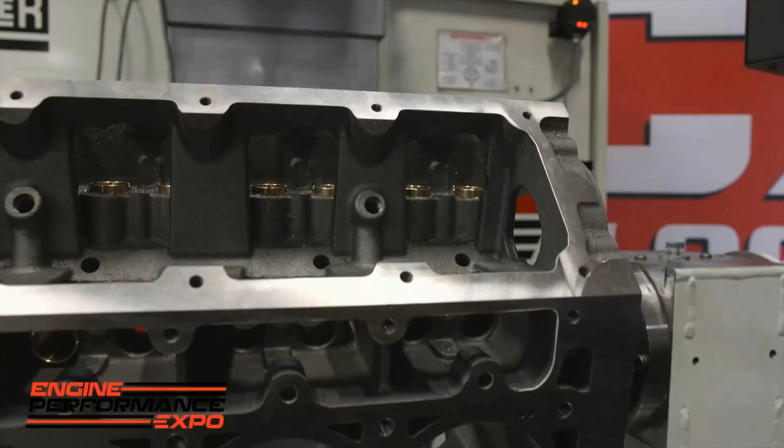This is like the Professor. Jaden is just 21 years old. It's kind of interesting how he fell into this career. He was just telling me a little bit about his life. He loves cars, and now we're on set with Warren Johnson.

Warren, these machines, you told us a little bit before, have just totally changed the way with which you can efficiently produce, try ideas, and do things. And we look at a guy like this, 21 years old, he's already working on the machine. We're going to work on some stuff here. Maybe you see a little bit of yourself in some of these young folks.

Oh yeah, well, they've got the luxury of these machines where I didn't have that before, but I appreciate what these machines can do. But the biggest thing is you have to look at the ability of the software to achieve what you want to achieve. When I design a port now, all I do is put the head bolts in it, put the valve seat in it, the valve guide, push rod holes, and I put a port in there, all on the computer. And Jaden, don't hand port it.

And Jaden, you guys were talking already. They were discussing speeds and feeds and different things about keeping the surface as clean as possible. Talk a little bit about that and how that information is obviously constantly updated.

Yeah, I mean, for any material that you're going to cut, every different head's going to have a little bit of a different, I guess, attribute to it. They're all going to look a little different in your surface finish. And for somebody like him to be able to just walk up and know immediately off the top of his head that something can change, it's pretty amazing.

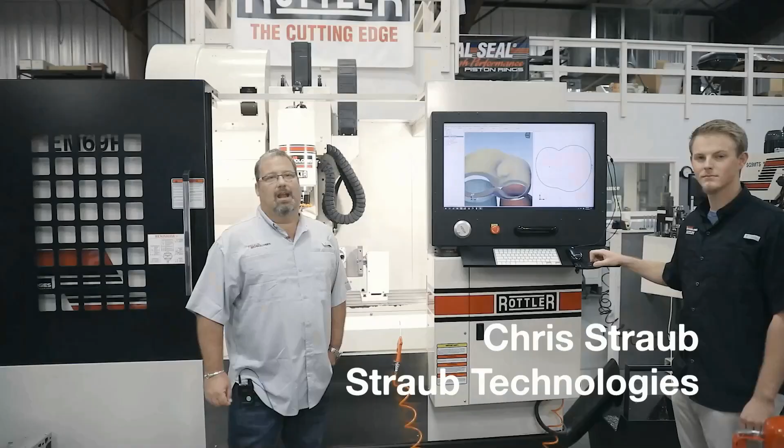Hi, I'm Chris Straub with Straub Technologies, and I'm here with Jaden McCurry. Jaden operates our EM69 Rottler CNC center that we use for porting. At Straub Technologies, we had come to a point where we needed something that could replicate the development work that we had been doing here for cylinder heads. Asking a few questions of people, what CNC cell we needed to buy for CNC porting, one company kept coming up, and that was Rottler. One reason is because Rottler is a self-contained digitizing and machining center. Not only can we use the Rottler to do the machine work, but it can also digitize the part that we want to replicate in the machine.

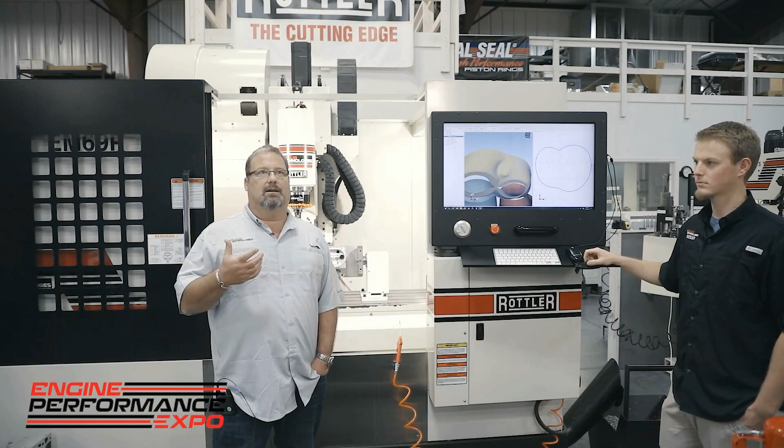Straub Technologies grew from my garage. Never thought that I would be doing anything like this. I've been in the industry for 25 years, but people now with the DIY mentality, they want to be that Grumpy Jenkins. They want to be that Keith Dorton type person and build their own motor. So with the Rottler, being able to produce over and over again the same quality part was important to me. I need to provide something for my customers, and that's what the Rottler machine allows us to do. When I bought the Rottler, they said, Chris, you don't have to know speeds and feeds and all this stuff. The machine knows that.

As long as you can work Windows, then you can become a CNC operator as far as doing port work and stuff. Now, for myself, that's nothing that I want to do, but I was able to hire Jaden, who came out of high school and adapted to the machine very easily. Even though Rottler uses their own exclusive software, it was something that he understood with his background.

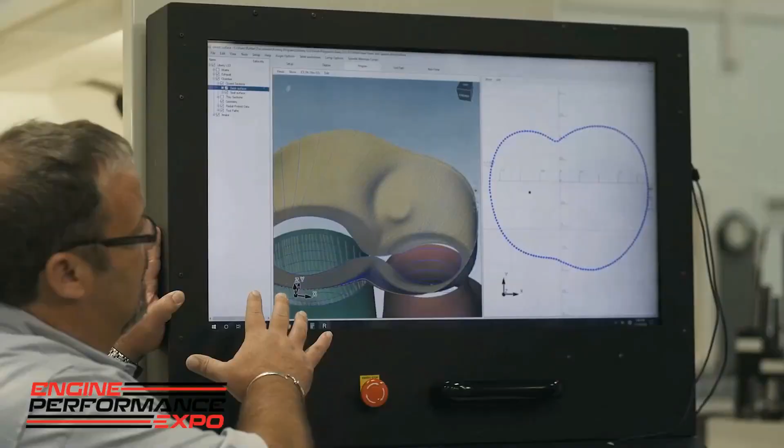So somebody thinking about buying a 5-axis machine for porting, they don't have to worry about Rottler's software. Rottler software is easily adapted to anyone that's had any background as far as the type of machining. So one thing that we do enjoy about the machine is the manipulation of any of the data points that Jaden is able to capture using the Renishaw probe on the cylinder head, easily seen here.

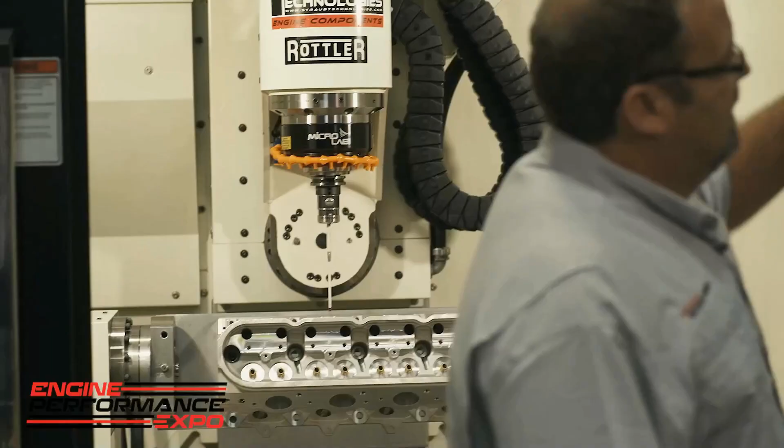And all of these lines represent captured data in the combustion chambers. Each one of these is where the probe has touched, so it's mapped out this combustion chamber of this cylinder head. And Jaden can then go into his computer system in his office, and anything that he needs to smooth or reshape is easily done. That's one advantage the Rottler has over multiple machines, its ability to capture data so fast.

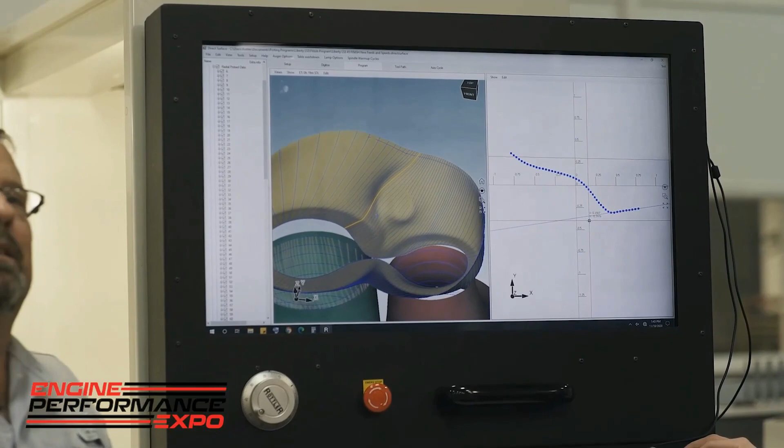You'll hear about people that have digitized over the years, and it might take them a week to 2 weeks to do an intake port, an exhaust port, and a combustion chamber. Jaden's been able to do this in a matter of a day. So that's important to me; I don't have to have as many people, but can produce as many parts as some other much higher volume shops. So for me, as a small business owner in the automotive performance industry, Rottler was my choice.

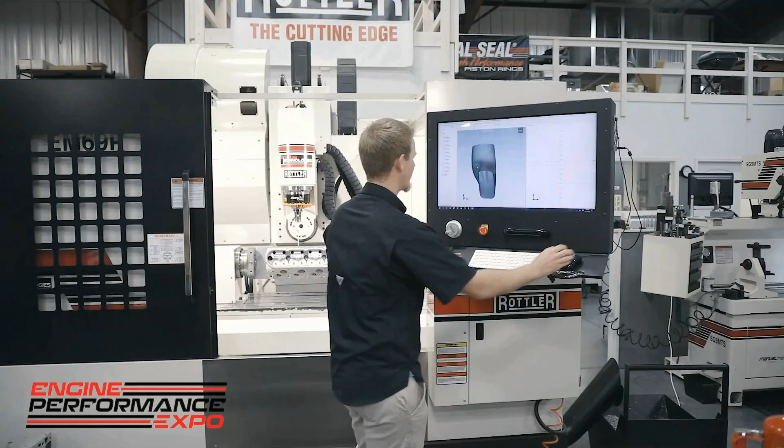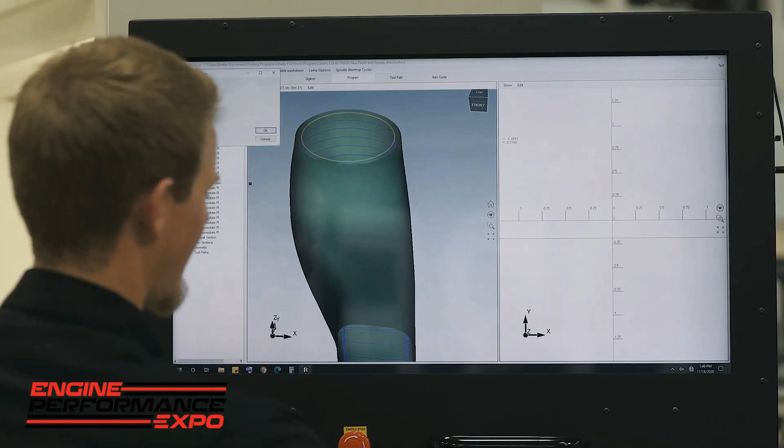Yeah, so this is a port that has already been digitized, and it's already got the through section, so it has its solid surface. If I want to go through and change, say, the plane that's right here on the seat surface, if I want to shrink this entire section, it's as simple as right-clicking on the plane. You can go to section offset. If I want to offset it, say, 250 thousandths, just so you can see what it does, you can see it blew that entire plane out just that quick.

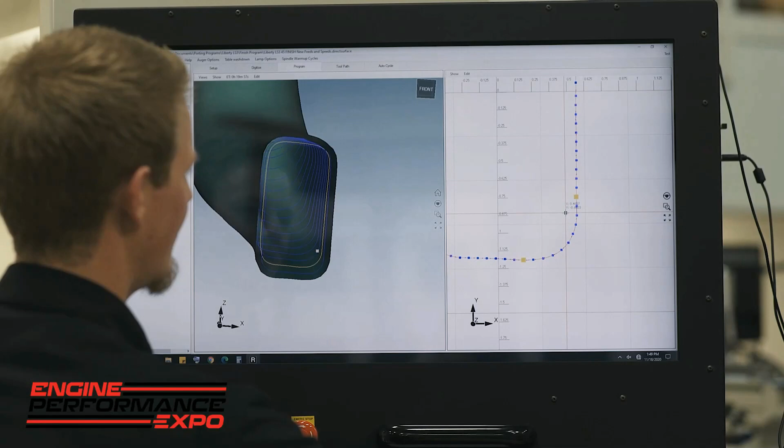So every little change that you make on this thing, you can see all the results just about as quickly as you want to do it. So say you want to change the radius in the corner of this plane. Click that, you can change your arc. So you just make it a straight line or whatever. And you can see it right there immediately as you do it. So it gives a really good representation as you go through if you want to smooth things. There's really not a lot of waiting to get things like you want it to.

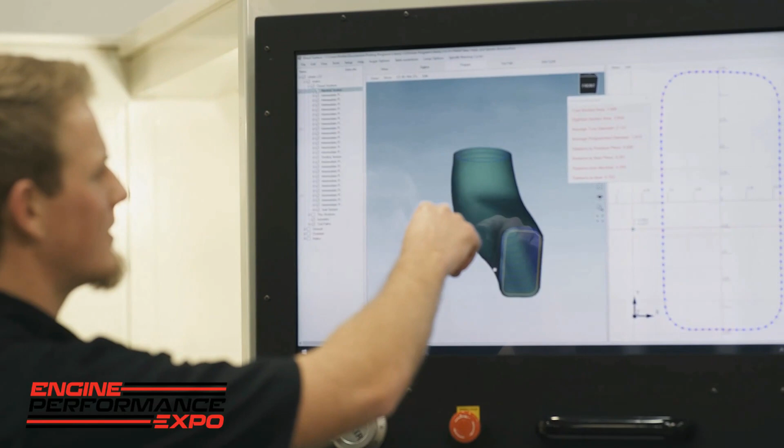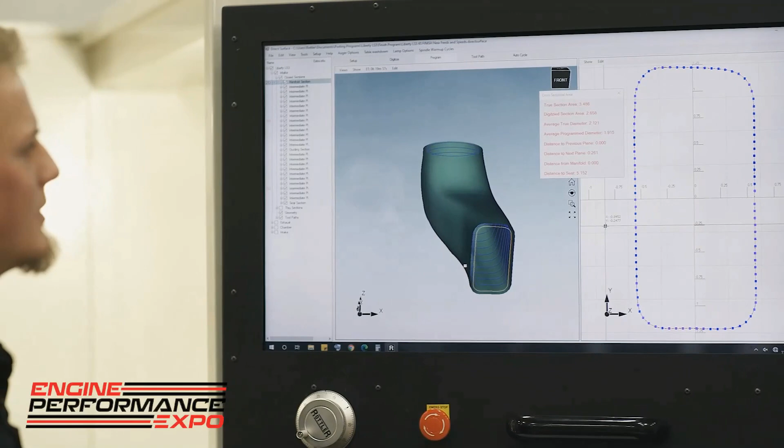With each plane that you go through and digitize, which is what all these sections are with the data points, it keeps record of the sizes, so it's got its own little graph, like a little representation you can keep track of, and you can check out your cross-sectional areas. So you pull the list up; this right here is the manifold section, the first section on the manifold side for the intake port. It gives you your true section area, digitized section area, average true diameters, program diameters.

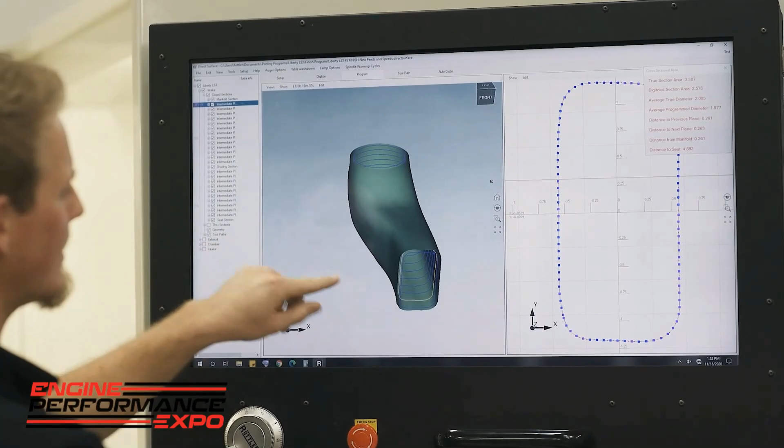It gives you the distance between the planes. It'll tell you how far you are from this manifold plane. So I'm starting right here at the manifold section. Right there it says distance to the next plane: you've got 261 thousandths. If I go to the next one, it shows distance from the manifold, so it shows that we moved 261 thousandths. So if you pick a random plane throughout your port, it can give you an idea of how far into that port you actually are.

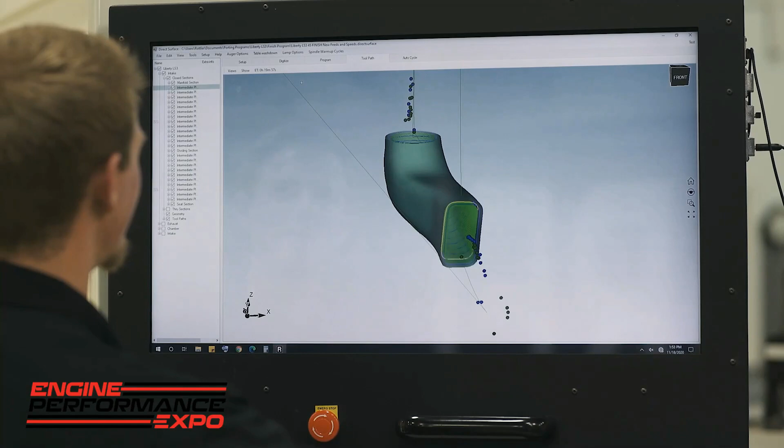Honestly, my favorite feature about this machine is after you've created your ports and you've got your tool paths created, it'll show you where your tool has run. In previous updates, you can hover your tool and it'll show a rendering of it pivoting on these pivot points as it goes through the port. And with the more recent updates, you actually have a function that will show you every spot that that tool moves throughout that port.

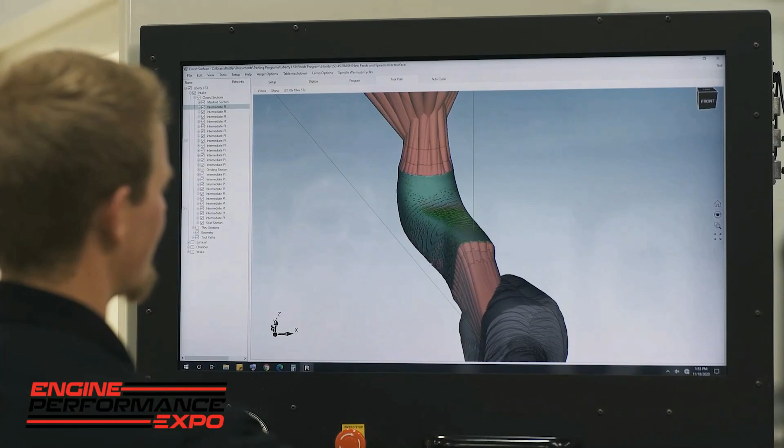And it's really nice because if you have long ports or ports that are making really sharp turns, if that tool is going to get down and try to rotate where it would actually dig into the opening surface, it'll show you that the tool will be poking through the side of the port. So instead of having to hover back and forth and hope that you catch it with your eye, or running it and just being really careful, you're almost guaranteed that you're not going to hurt nothing with that feature.

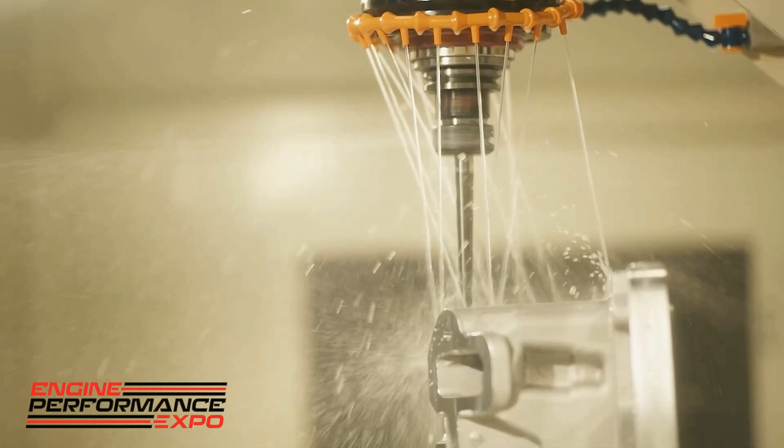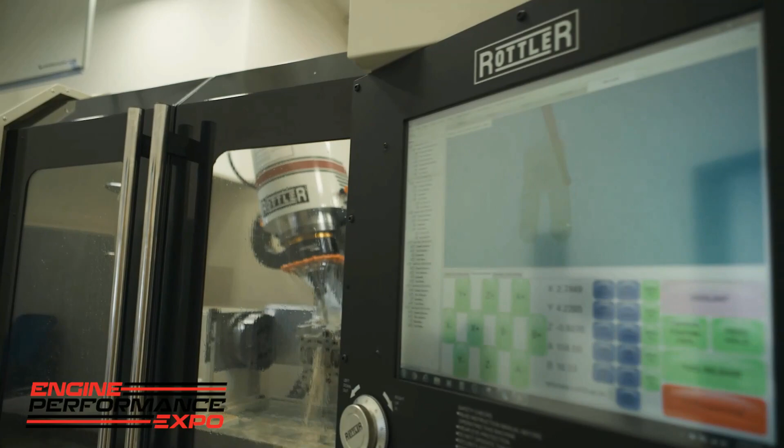Standing in front of our Rottler P69 AHD, it's a cylinder head porting machine. Years ago, we were all kind of talking about possibly purchasing a machine, because we were porting a lot of cylinder heads by hand, and it was taking just way too much time. Literally 8, 10, 12 hours or more for import heads and V8s. We do a lot of imports, a lot of domestic stuff.

So we looked at a bunch of different machines from a lot of different manufacturers. The Rottler basically stood out in front because it's an all-in-one type of machine. So we can hand port a cylinder head, get it on the flow bench, make little changes or whatever we want to do, get the head in the machine, actually digitize it in the machine, do all the modeling, surface modeling, look at how the port design looks, create all the tool paths, run little tool paths, make changes on the fly if you want, and actually port the head in the machine. It doesn't have to come in and out, in and out.

Stuff that used to take us, like I said, 8, 10, 12, 14 hours. Now with this machine, the CNC cycles are generally 2, 3, maybe 4 hours at the most. So you're definitely saving a lot of time.

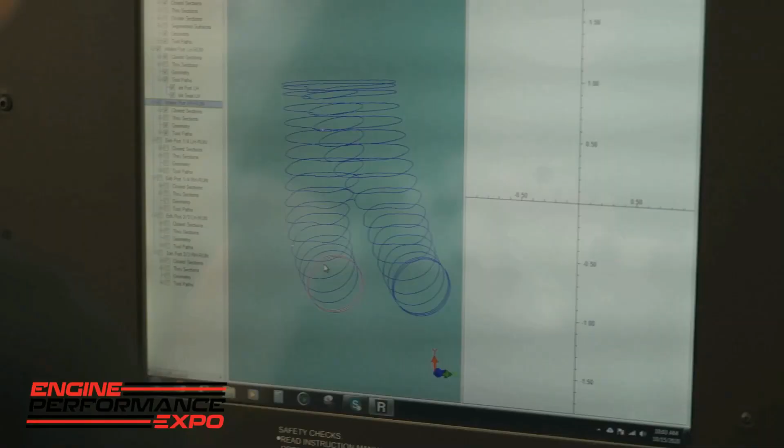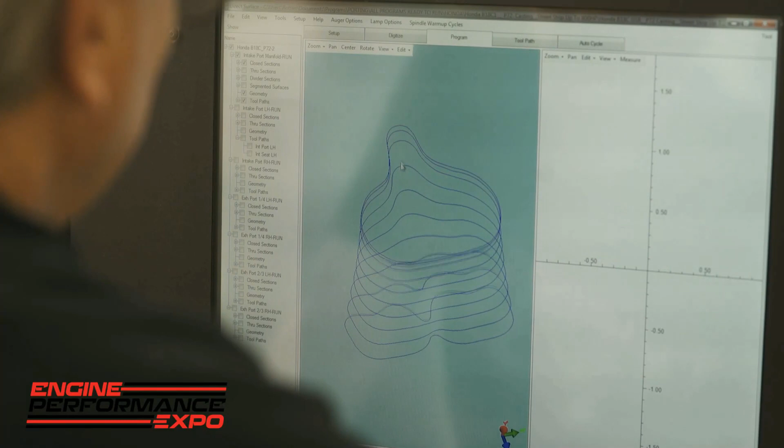Yeah, so basically with the Rottler software, after the head has been ported, you put it in the machine and we start the digitizing process. The probe will come down and actually digitize each of these little pie slices, as we call them. So it's making a digital copy of what you hand ported.

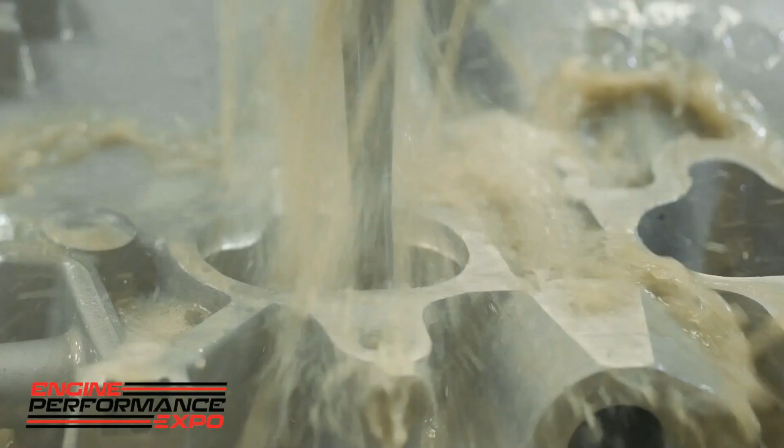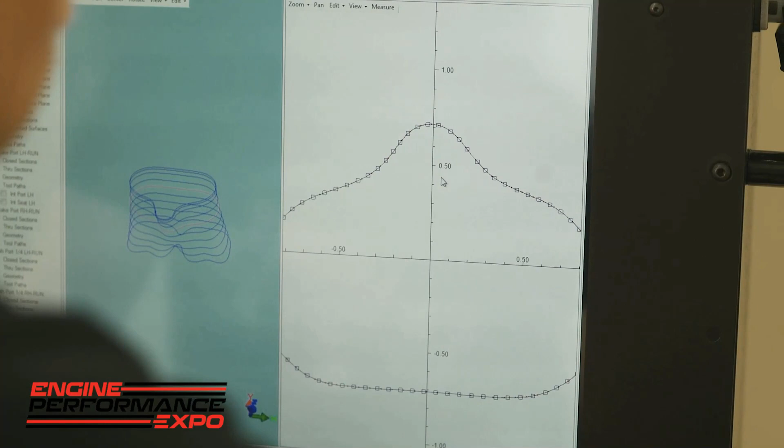And once these are all digitized, if you want to edit the shape of any of these, you can just grab any of these lines and points and move them. So if you don't like the way a curve is, or maybe the probe hit it just a little funny, or your port wasn't as perfect as you thought it was, you can edit it there. And they have smoothing operations that will help smooth out the port and line everything up a little better for you. And it's all done on the machine.

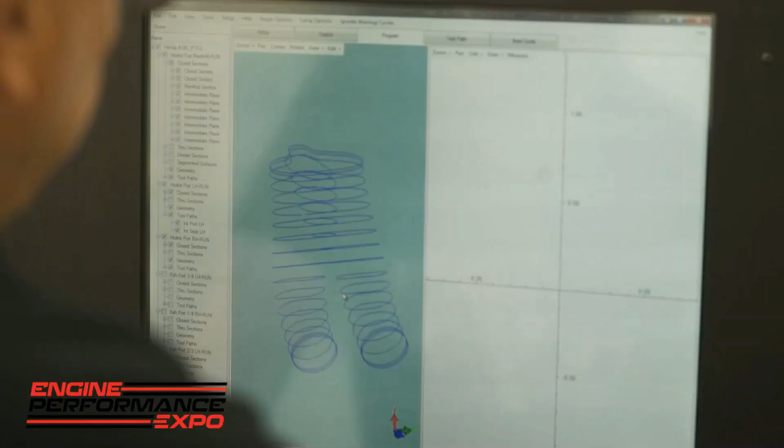And once you're done with that and you like what you see, then you can start creating the tool paths. After it's digitized, if you have to make any changes, you can make your changes. You can click on any of these points. You can move stuff around. It has smoothing operations to blend the stuff a little better. Sometimes when you hand port, you think you have it perfect, but you don't.

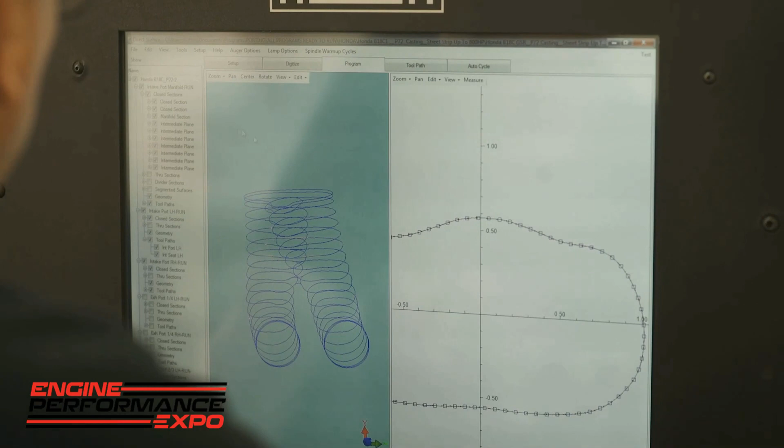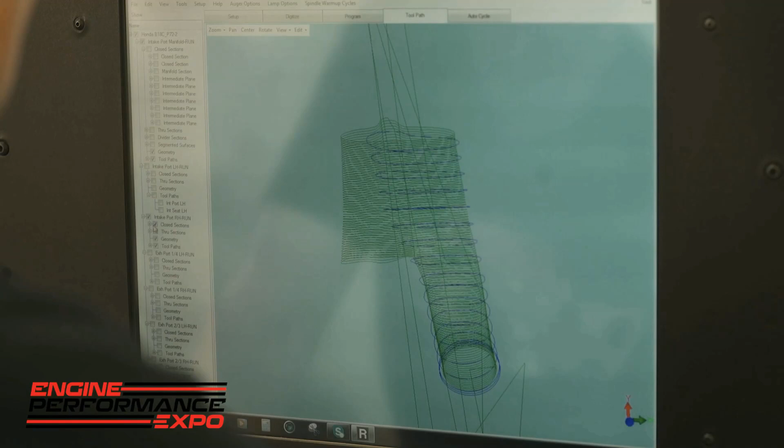So everything can be modeled and modified, and you can bring up a solid version and look at it on the port. So it's going to show you exactly what it's going to do before you start cutting the head. And you create all the tool paths. So all these green lines, this is what the porting tool is going to do, going through the cylinder head to cut it. And because it's saved and it's all computerized, it's going to repeat the same every single time.

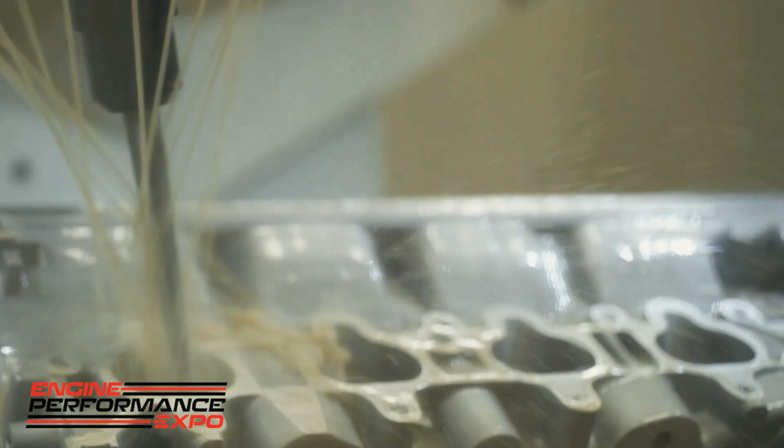We're not all about making the ports huge. We try to work with them, keep the velocity going and stuff like that. And with the turbo, you can actually CNC port the head, make more horsepower with less boost, which in the long run is going to actually help the engine. So you can have a little more streetable product. But if you do want to change it up, you do have the room to expand, pick up the horsepower level.

We're doing a lot of import stuff. Probably one of the hardest heads we started on and got trained on with the machine was the Subaru EJ series heads. Probably the hardest heads to kind of jump right into. But we got probably a dozen different programs just for all the Subaru heads alone, all the different castings and horsepower levels and stuff like that. We've got 400 or 500 horsepower street engines up to 1,100 horsepower all-out drag engines. And the sky's the limit.

I mean, the awesome thing about the machine is the repeatability. When you hand port, you can get tired, you can get sloppy. Like I said, the hours are just uncountless, but once the program is run, it makes it the same every single time. And if you do want to make a change, you make the change. If you like it, you save it, and it will do it the next time at the push of a button, basically.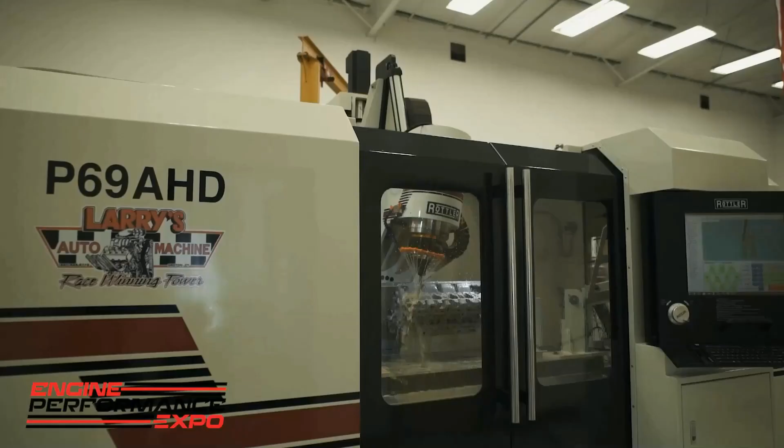Yeah, we quite often get asked why we picked the Rottler over some of the other machines, and it's just we've had a relationship with Rottler, with the other machines we've bought in, the F68A, serial number 1, outstanding machine, our cylinder hone, the H85, the seat and guide machine, but it's just the price for what you get is just phenomenal.

My name's Brian Harrison, work for BES Racing Engines. Worked for Tony for about 9 years. Been running these current machines here for about 7. We're here to talk about the Rottler P69. So we use this machine to run numerous cylinder heads here at BES, and this is one of our heads, a pretty known popular head for Ultra Street.

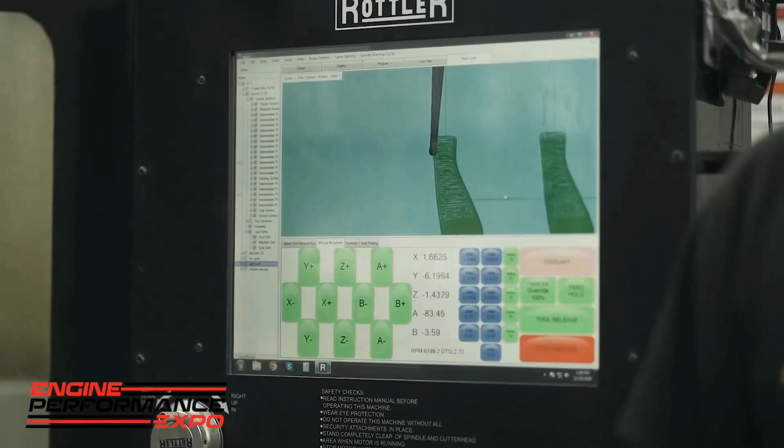It's a high port, Trick Flow, small block Ford head. We can run this whole particular head in roughly about 3.5 hours in this machine. Intake port, chamber, and exhaust port, and we also run our push rod clearance in this too. That's kind of a nice feature to be able to do. Yeah, this is an intake port. Sometimes we use different length tools because sometimes they chatter, just because of tool length, and try to cut more material out. We just try to cut as much as we can with our tooling.

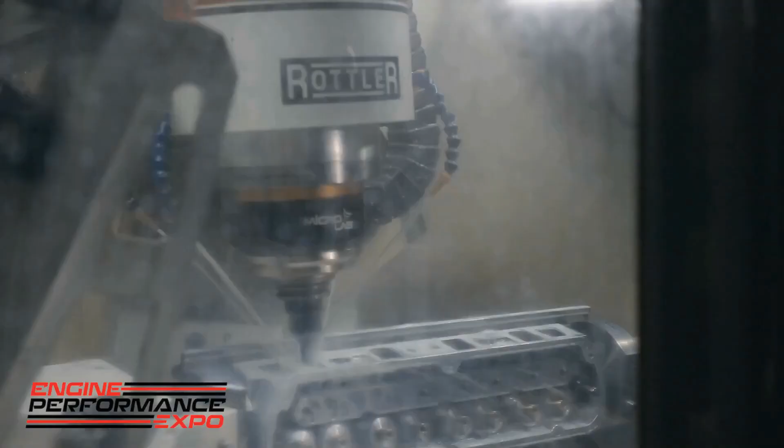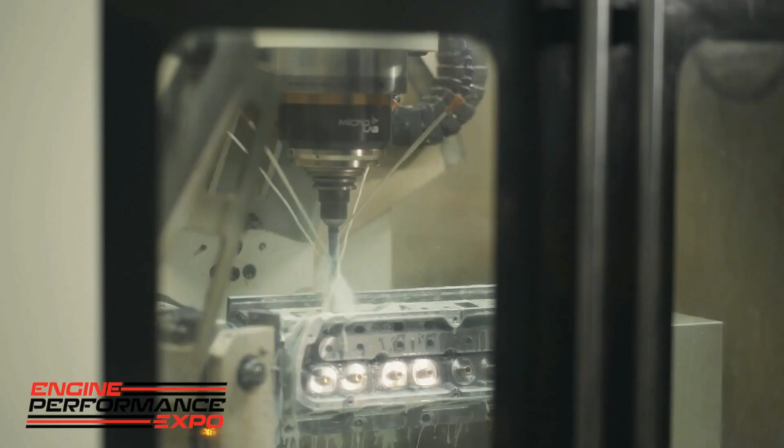Get a long tool like that, it's hard. This particular head here, we actually plug the exhaust bolt holes, then we face mill them in here, but I just do that manually. Just use a fly cutter and shave off the exhaust flange to make it smooth. We go to roughly about the center of the short turn to keep the tool from shanking out, which on the long side would be just a hair below the valve guide typically, kind of where I shoot my line of sight here.

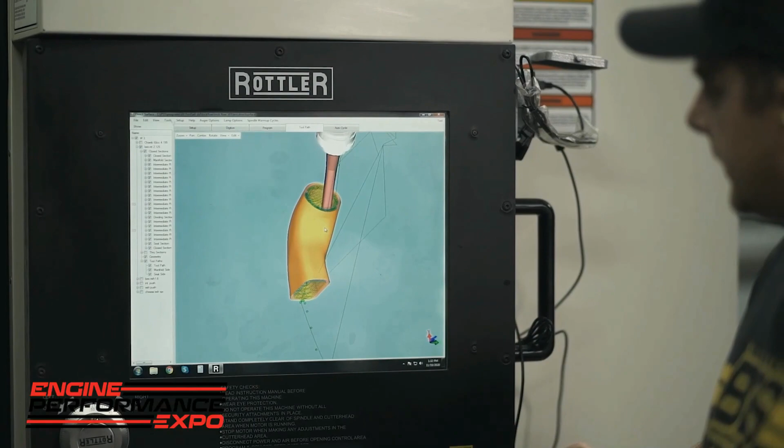I can kind of show you here maybe. This is our tool path here. So yeah, being able to bring this up in the tool path, it helps out a lot to save time from trying to dry run something, to make sure the tool's not going to crash. It definitely helps a lot of different scenarios.

Rottler, especially in the cylinder head department, building a CNC machine that was that fast digitizing stuff. Used to be, when I bought that machine, most guys took a week to digitize a cylinder head, intake, exhaust, and a chamber. And with Rottler stuff, you can mess around and get it all done in 8 hours easily. My guy's been doing it for quite a while, and he can do it a lot faster than that now. It's very user-friendly. It allows somebody that's not trained to be a machinist to get in there in a couple days with training.

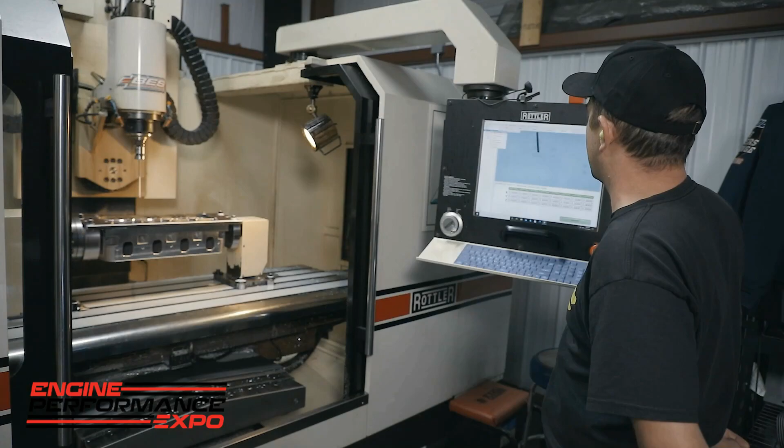You're porting heads. You're ready to go. So with the P69, we have the Renishaw probe. So we can basically just go in here and click on, bring up a program, make a program, click on here. You can add ports, chambers, you can do patches. But anyway, I brought up a port here, just like an intake port.

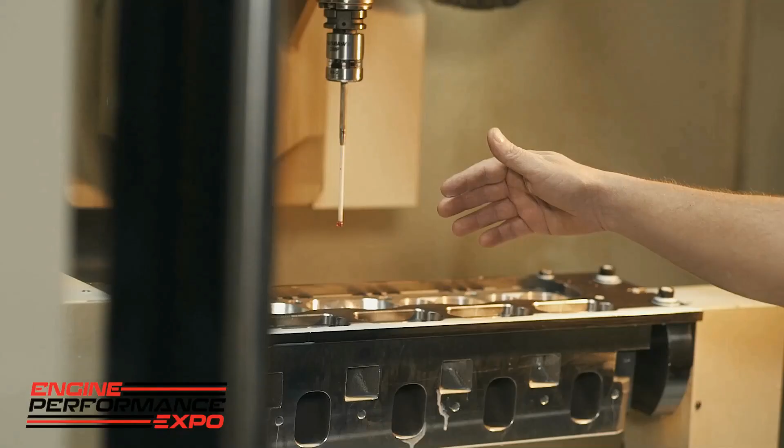So basically you would want to start the port on the intake manifold side. We've got to develop planes to digitize to create a port. And you can do all that, roughly do all the digitizing itself and creating tool paths, all within about an hour and a half to 2 hours, according to what kind of intake port you have. It saves us a lot of time over doing something like that by hand.

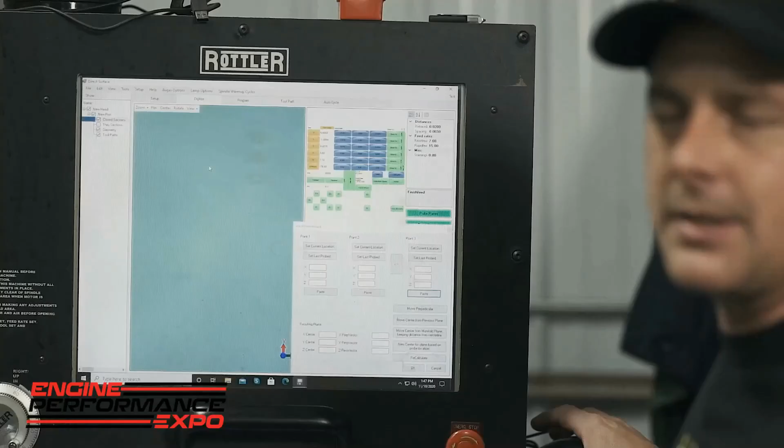To be able to come in and do that for the engine building side of it to get the job done, couldn't even say how much time it saved us, but it's an enormous amount of time. You can digitize a chamber in probably an hour 15 minutes to an hour and a half to get it ready to run also. Say you have a port created, you can go in here and you can just manipulate a port, so you can move the whole port X, Y, or Z. You also have a blend deal for the tool path to make it smoother.

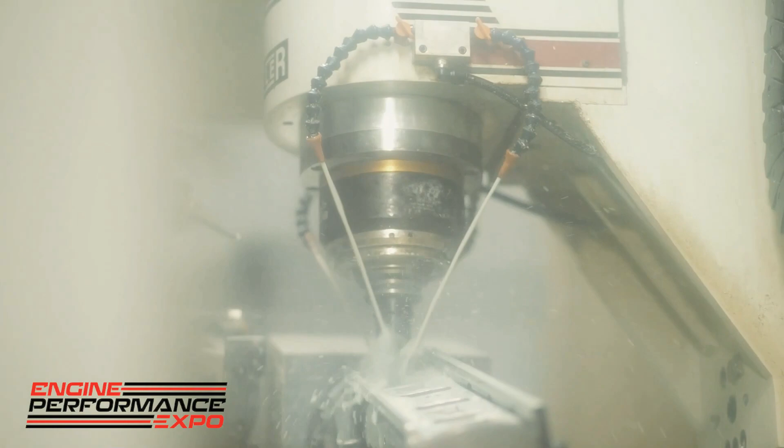We run about a 30 to 32 thousandths step over typically on a finished path. So on our OEM stuff, the guys don't even have to blend them. I digitize a little area on our OEM stuff because it's so consistent, so the guys don't even have to really blend it. So it works out really nice, saves a lot of time. Just blend out one bowl and just digitize that little area where you would do it by hand. And sometimes you got to play with the size to get it to where it don't cut too big or too small, but it works great.

So mostly we do all of our digitizing in this machine here, really for no reason other than we just try to keep all of our new data in one machine. So you can just take basically a flash drive, hook it in and get your data on a flash drive, then you can just transfer it to the other machine.

The Rottler cylinder head machine definitely made it profitable for us to do one-off cylinder heads and CNC them, and that's a huge help because we do mainly one-off engines, so we don't do a lot of cookie cutter stuff that you can afford to pay somebody a week to digitize ports for you. This really upped our game.

What a day, what a day, what a day. Yeah, my brain is swollen. I've learned so much today. They told us, don't start cars. We are not